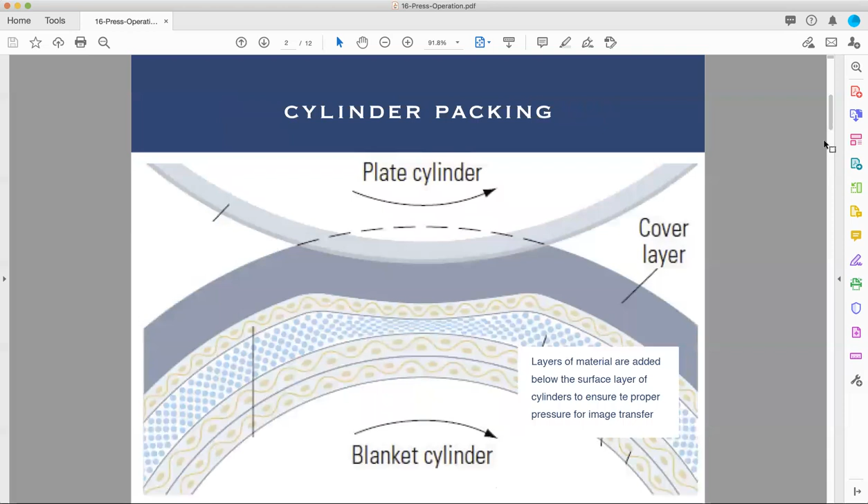Let's talk about feeding systems here. So again, this whole chapter is simply on sheet-fed offset printing. Web-fed offset printing is almost only in the realm of newspapers, although not exclusively. Sheet-fed is more common for most print shops around the country, around the world, and most print jobs are done on sheet-fed.

So the feeder systems on the left here, we have successive sheet feeding, where the machine will pick up one sheet at a time completely. It picks up one, it puts it all the way into the machine, and the machine starts running it before it goes back to pick up the next one. There's also something called a stream feed. And a stream feed is like when you take a deck of playing cards and you spread them out on the table in front of you like a really cool dealer at a casino or something.

Not that I would know, I'm actually really awful at card games. Let's play for fun and put a little money on it, right, guys? Chuckle, chuckle, not a shark. Anyways, actually, I'm really not.

So stream feed, you're laying the sheets on top, or the machine lays the sheets on top of each other, and then it will take them as it needs them from that stream. Stream feeding is faster, though a little harder to control than successive feeding. Successive feeding is more common on smaller, simpler presses, and stream feeding is more common on larger, more complicated, more industrial scaled presses.

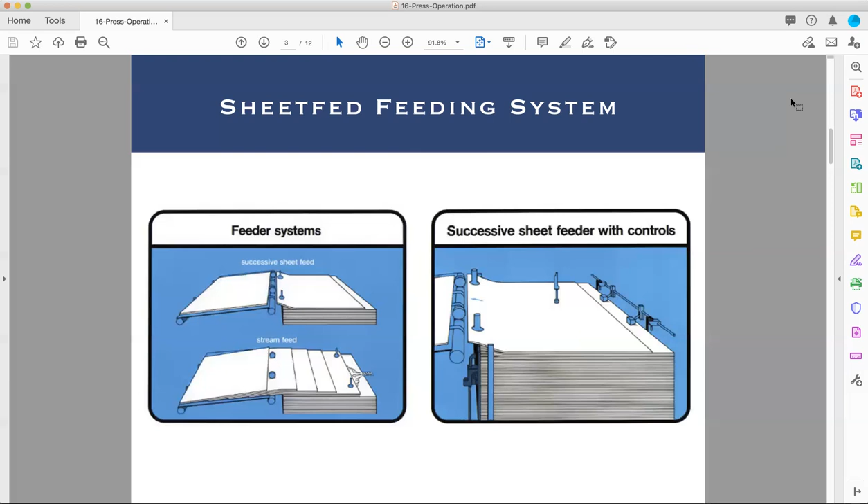Now, to mount plates. These are actually the steps to mounting plate cylinders. Here's what you got to do. Step 1, you actually need to clean and dry the plate cylinder. Even a wet plate cylinder can mess you up. So it needs to be clean and dry. No debris, no old ink, no old chemicals, no lint, nothing. Clean, all the way clean. Then you rotate it around till you find the lead clamp.

The lead clamp, this is a bad picture for it. It's the best photo I could find online of one of these. And the pictures I was taking in the lab turned out pretty awful. So here's an online picture, guys. This one's a magnetic system, which is not going to show the clamp, but at least the attachment point is still in the place where a clamp could have been.

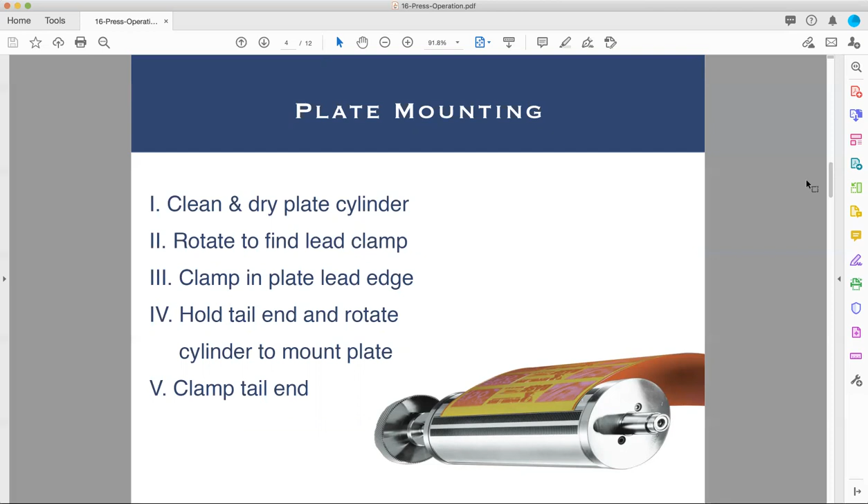So you clamp the lead edge in place. Then you hold the tail end, which is the end not clamped, and you rotate the press slowly. Oftentimes you're turning the cylinder by hand on a hand crank and maintaining tension on the other side to wrap it around tightly and hopefully straightly. And once it's all the way around the cylinder, then you clamp the tail end in, and then you can adjust the clamps until they're straighter and tighter.

Now let's talk about setting up the cylinders. Did you know that a lot of offset presses, when you set up to print, you're not just setting up, you're actually assembling the press. That's right. When not in use, a press will find itself in pieces. And that's not a problem. That's a design feature. There are so many small rolls and so many confined spaces on these machines that it's actually a lot easier to reach in and clean things properly and keep the machine maintained if some of these parts simply come out.

So on some bigger presses you may not do this, but on many presses, you'll have to install the parts as you set it up to print. So the first thing you do is you set up your plate cylinder, which we talked about in the last slide. You get the plate attached, wrapped, and aligned as best you can. Then you clean the blanket and you adjust the blanket packing if you need to. We'll talk more about the methods of doing that in a minute. Then you want to set up the impression cylinder to give the right amount of press against the blanket cylinder. Make sure, again, it is clean and dry.

Wow, there's a good ham-handed typing. I guess my fingers were slurring their speech a little there. Clean and dry. Oh no, clean and dry, never mind. There's an and there, cleaned and dry. Well, I guess we could add an apostrophe, do like a pre-dictionary spelling, back when the English language was a bit more loose with the spelling and people would write everything phonetically as they thought it. Good times back before the Regency period, and they nailed that down. Curse you, Webster.

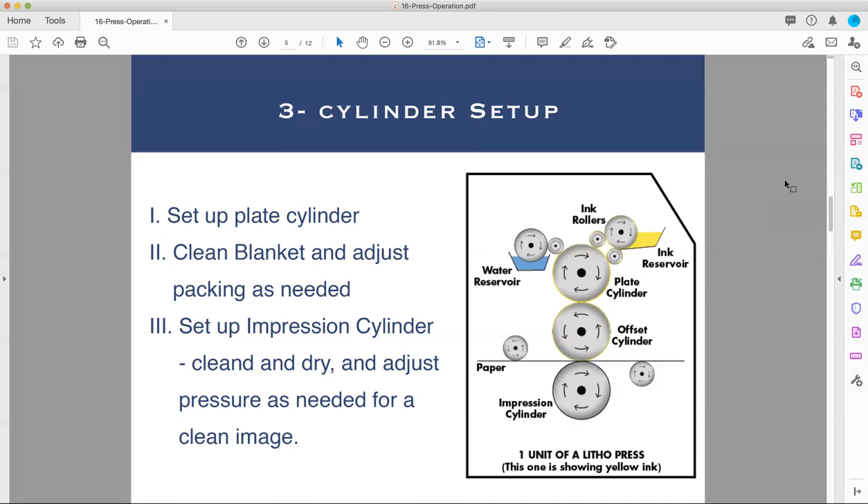So the cylinder packing gauge is the easy way of knowing if your cylinders are packed the right amount. The cylinder packing gauge can actually measure these things for you. It's a specialized caliper or micrometer that will measure the distances involved with the blanket to make sure that it's sticking out the exact right amount, to make sure it's pressing the exact right amount against that plate to get the exact right amount of ink transferred.

The packing gauge is a great tool that saves you a lot of trouble. It's possible with good rulers and some good math to calculate the packing necessary using our old friend Pi.

It was just Pi Day recently, wasn't it?

And a lot of time on a calculator or by hand if you are a masochist.

Anyways, mathochist. Ooh, how did it take me this long to come up with that word? A mathochist, someone who prefers to use the painful method of hand math. Wow. All right. Somebody call Urban Dictionary. I'm getting on there. So we're moving on from here.

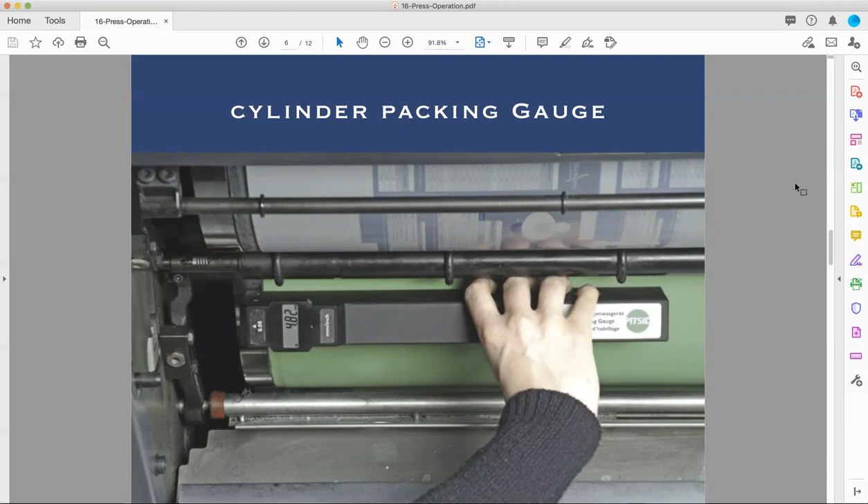So packing gauge will do that for you. You got to love when tools do your math. It's quite nice. Lets you do your other jobs easier.

So then we have to set up the dampening system. We talked about this a little bit last time. What makes an offset press and one of the key features of an offset press. If you're looking at a press and you're not sure what kind of system it is, and you've never heard of that brand before, or someone has gone by and popped all the brand names off, so you can't go by that, you have to look at a press and tell what kind of press am I looking at. The existence of a fountain system or a dampening system will tell you that it's an offset press.

So when you're setting it up, the first thing you do is you formulate your fountain solution. Remember, your fountain solution is distilled water, gum arabic, and a little bit of phosphoric acid. Typically speaking, you don't have to find those things separately and make a witch's brew to put on there, but you'll buy a jug of pre-mixed concentrate. We talked about this last time as well.

It's kind of like those jugs of concentrated fruit punch you get at summer camp, where they pour it into the giant igloo cooler and either add way too much water and make everybody sad, or not enough and make all the kids hyper. Anyways, both the scenarios have happened to me in my life.

and the ductor goes back and forth. The ductor can either go back and forth in a more staccato method, where it spends very little time touching the fountain and very little time touching the rollers that actually put water onto the plate, or it can do a more legato type tapping, where it will spend more time touching both, and that will allow it to transfer more water.

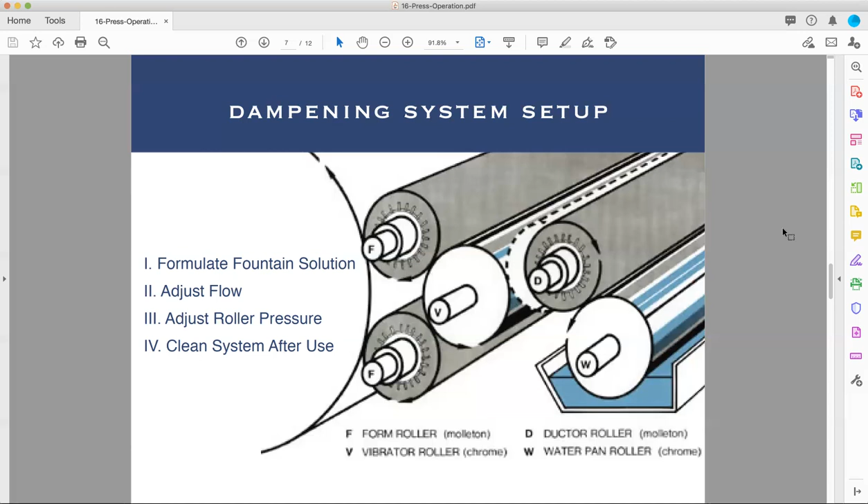Whatever you're doing, your job isn't done until you've cleaned it up. Yes, you've made your craft, but the craft isn't done until you throw away the paper scraps and put the paint back in the drawer. Anyways, you need to clean this up when you're done. I know you're thinking it's only solution, it's just water, but it builds deposits, it leaves stuff behind, and it will ruin your press if you don't clean it up. So please, clean your press when you're done using it. Especially if you're using one of my presses, then you better clean that up.

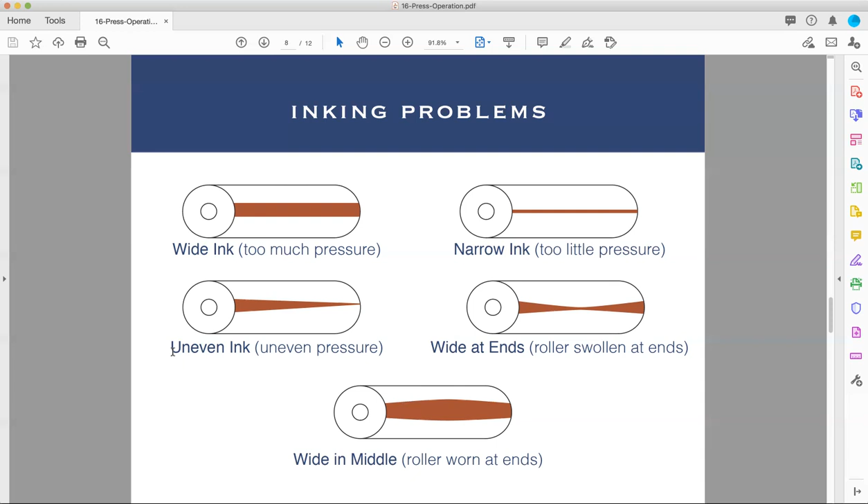All right, we're going to pause here. We'll come back to another video to finish off this lecture.